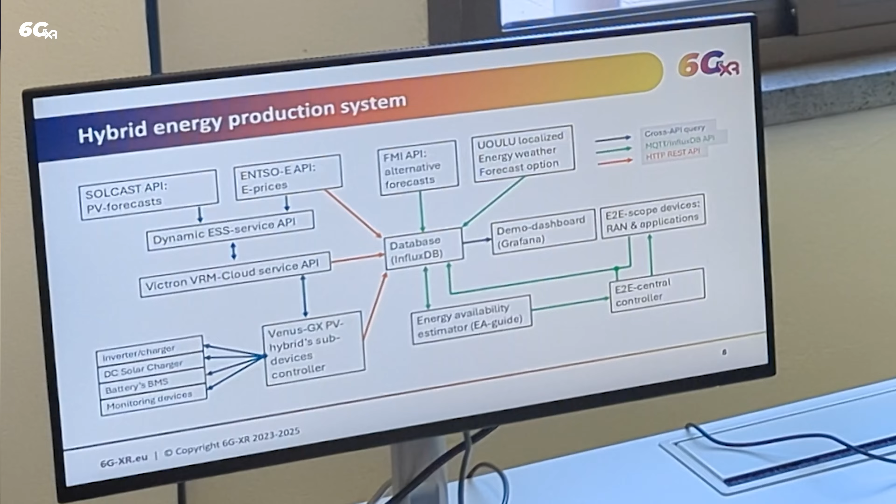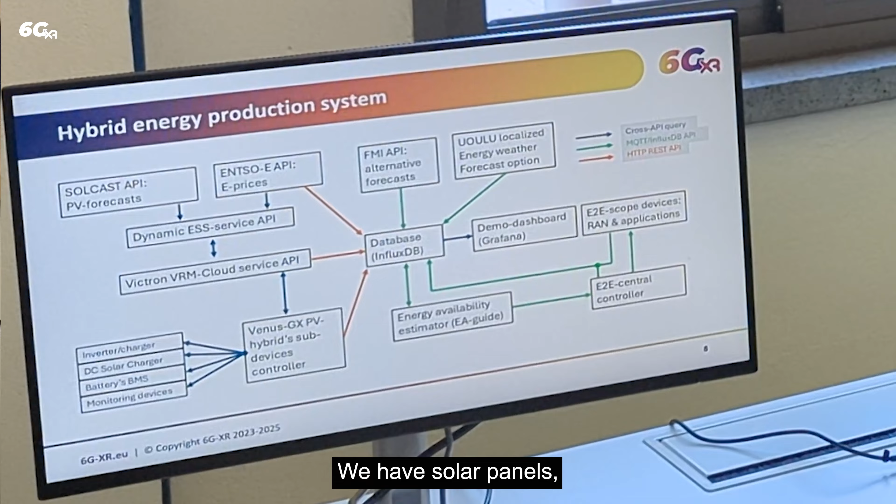The second part of the demonstration is the energy production part. We have implemented and deployed a local renewable energy system at the test facility where the demonstration is running. We have solar panels providing local renewable energy. We have a battery system that can store the generated local renewable power for nighttime use, and we have grid power or grid energy available as well.

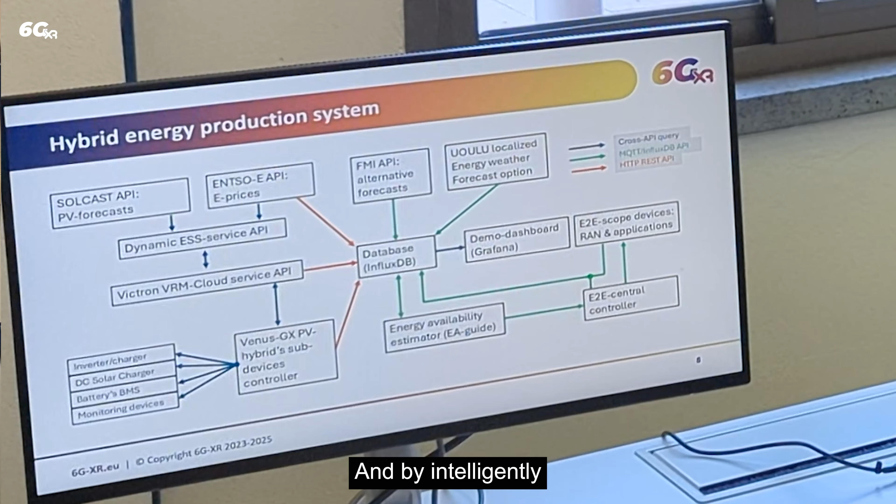And by intelligently switching between these different power sources, depending on the energy need in the network, we can, let's say, enhance the sustainability of the end-to-end communication in different ways.

The network architecture that we are using is a 5G network comprising one macrocell providing the overall coverage for the users. Then we have two capacity cells, hotspots, providing extra capacity for situations where there are multiple active users transmitting or receiving video at the same time. Depending on the need from the users, we can switch on different energy saving features in the network components or in the base station, so that we can play between the maximum capacity and maximum saved energy at different times.

We also measure the energy consumption of the user devices in order to get the end-to-end view in the demonstration. So we measure also the energy consumed by the handheld or battery operated devices in different configurations.

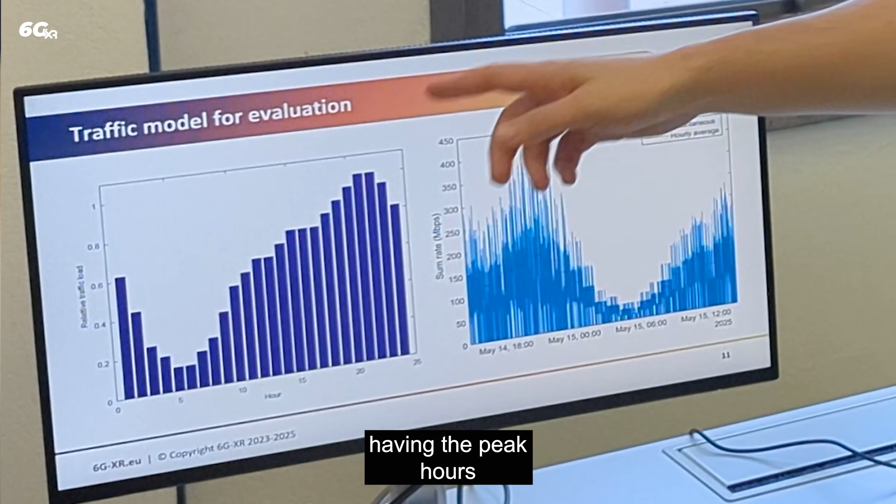And in order to have realistic traffic for the system, we follow a 24-hour traffic model where the load in the network is lowest during the nighttime and increases during the daytime, having the peak hours focused around 8 p.m. at the night time period, which is, let's say, a realistic assumption for a commercial network operating in the city area. And based on this traffic profile, we generate the test traffic that we also show in the demonstration here.

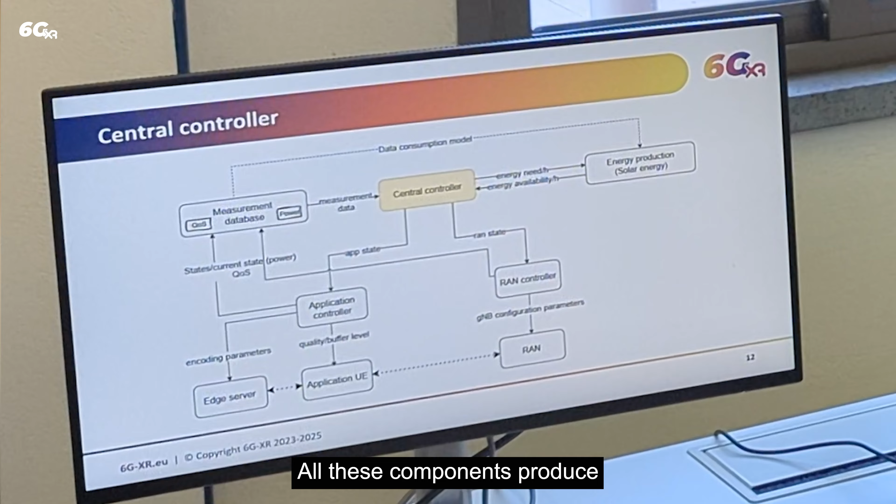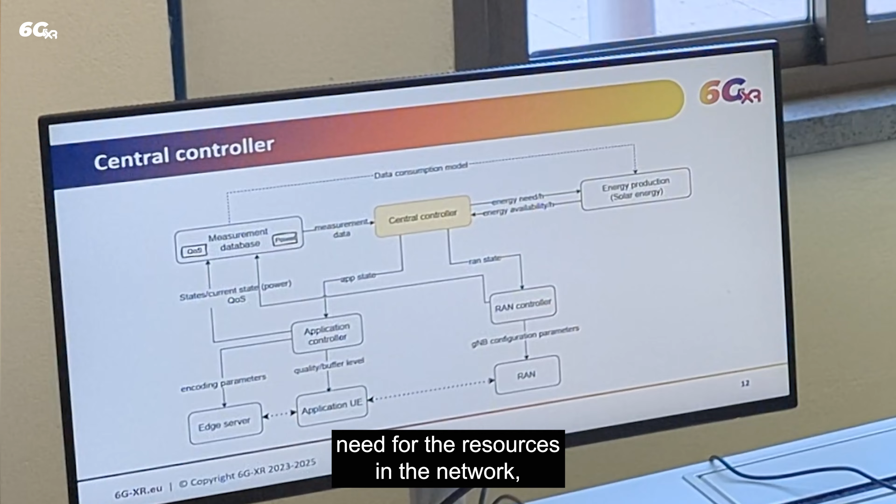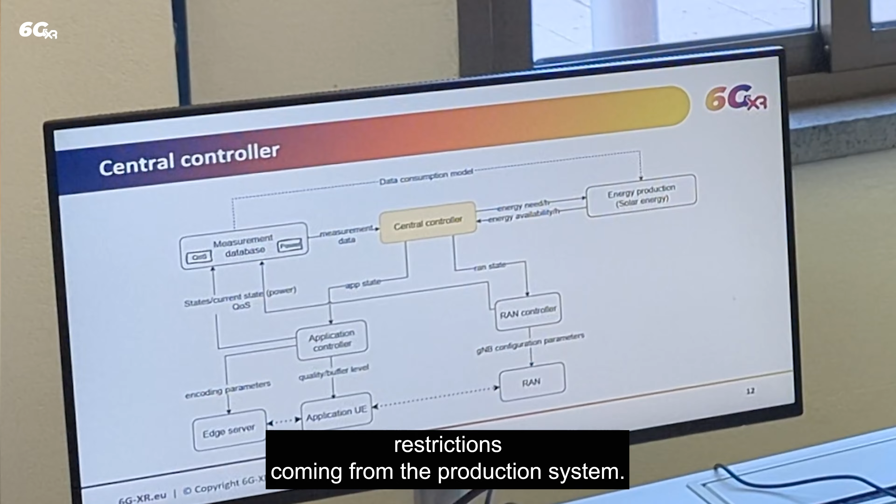All these components produce data that we take into a central controller component that estimates the need for the resources in the network, how much we need to save energy in order to comply with the energy availability restrictions coming from the production system, and also through the central controller we can modify the quality of the video that the clients are receiving.

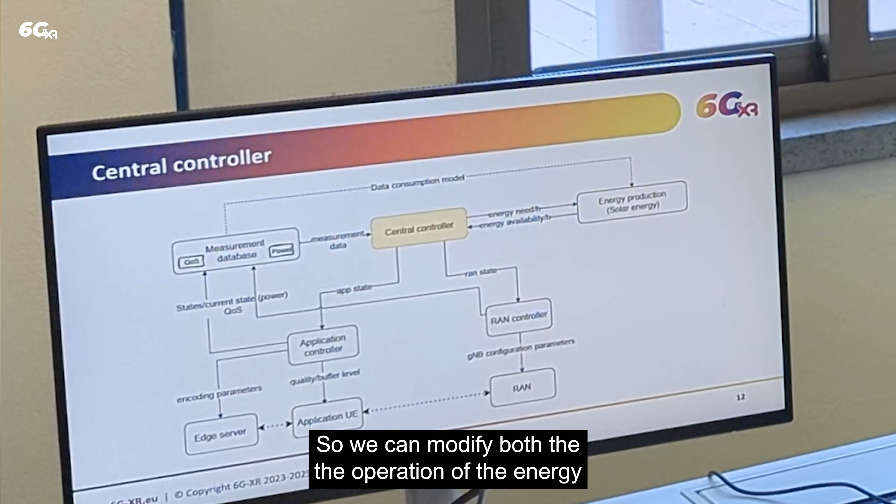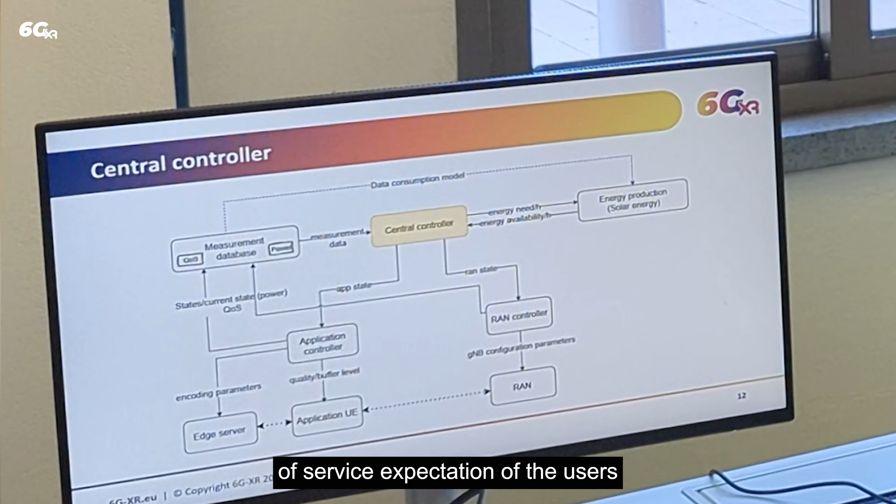So we can modify both the energy consumption versus capacity trade-off of the mobile network, and then fine-tune the application, the video quality, in order to meet the quality of service expectation of the users when we have a lower amount of energy available for the network operations.

And the functionality of the demonstration as a whole goes in the steps shown here. So first, for each of the starting hours, we generate an energy budget based on the availability of the local renewable energy and the electricity price from the grid. And based on these two main parameters, we set a limit for the mobile network, how much energy it can consume during the next hour.

Based on this limit that we calculate, we decide the energy saving features we need to activate in the base stations in the network, and also the video resolution for the clients to receive during the next hour. And based on these calculations, we configure the network for each starting hour, and then monitor the energy consumption and the performance of the network during that time period.

And during the monitoring phase, if we see that the quality of service of the clients is not met for the next hour, we can then adapt again the video resolution together with the energy saving features of the gNodeB. So for each hour, we run this loop of deciding the threshold for the energy consumption, and based on that limitation, we try to optimize the parameters of both the network and the application, so that we get the maximum quality of service with the minimum amount of energy.

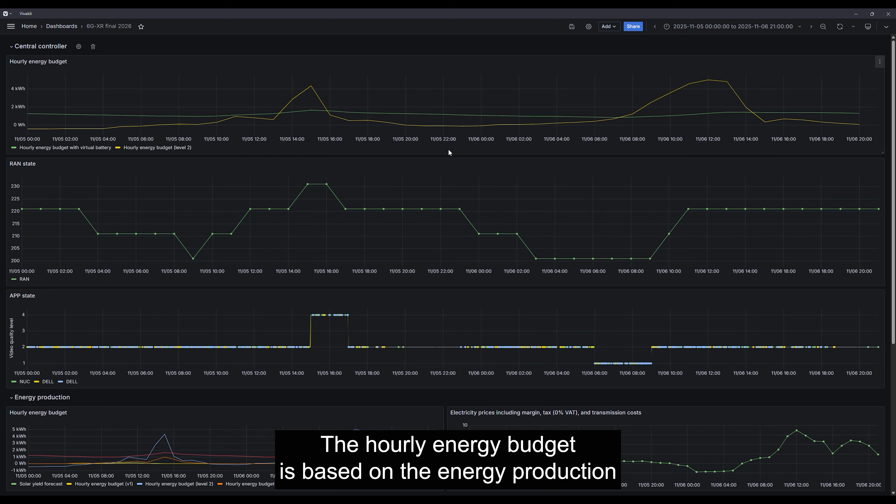The central controller component in the network infrastructure takes this monitoring data and decides the system configuration for the next hour. The hourly energy budget is based on the energy production data and defines the maximum allowed energy consumption for the next hour. Both the network configuration and video application settings are changed based on the central controller's optimization decisions as shown in the panels.

The RAN state is a combination of different energy saving methods that can be activated in the equipment, and the application state defines the resolution and bitrate used for the video content. When the network configuration has been set for the next hour by the central controller, the end-to-end power consumption, as well as the end user's quality of experience, is monitored.

For the video application used in this demo, the monitored KPIs include experienced throughputs, delays, and the state of the video buffer. If the power consumption of the network infrastructure exceeds what is defined in the energy budget, or the quality of experience is unacceptably low, the RAN and the application states can be reconfigured by the central controller.